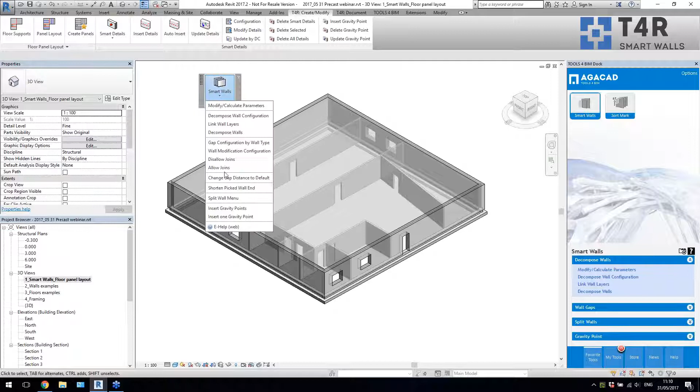So today I will use a couple of tools, and the first of them is Smart Walls. Okay, all of the commands are listed here. I can use it from this dock, or I can click on this one and drag it from here, and I can find the same commands here. So I can do the same with all the tools, and also if I need some help I can click on this one and it will bring me straight to the help page, some getting started videos, webinars and technical documentation. But let's take a look at how it works and what we can do with this solution.

So when you model some elements in Revit, you can further use our tools to reach the result you want. So what do we have in Smart Walls? We have Decompose Wall. This option gives us the opportunity to split the multi-layered wall into a couple of walls. So if I select, let's say, two of these walls and click on Decompose, I have some configurations for how to decompose them, what wall should still remain and so on.

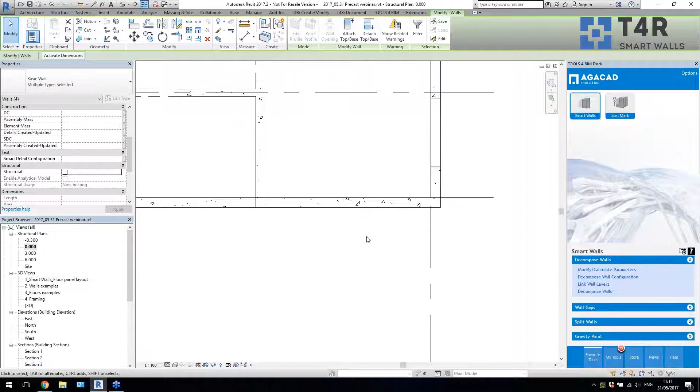But now you will see that I have different walls, and I can select them, and these are not the layers anymore, but only walls. So let's say I make them architectural, and I have only structural walls now. So that's one of the features, but let me just undo that. Let me leave it like this.

And what I actually want to show is other functionality, which I use more to create panels for the precast elements. In the wall gaps section, I have gap configuration by wall type settings. In these settings, I can define what the gap should be when I split the walls into panels. So let's say for this type of wall, I want a 20 millimeter gap. For this type of wall, I want a 0 millimeter gap, and so on.

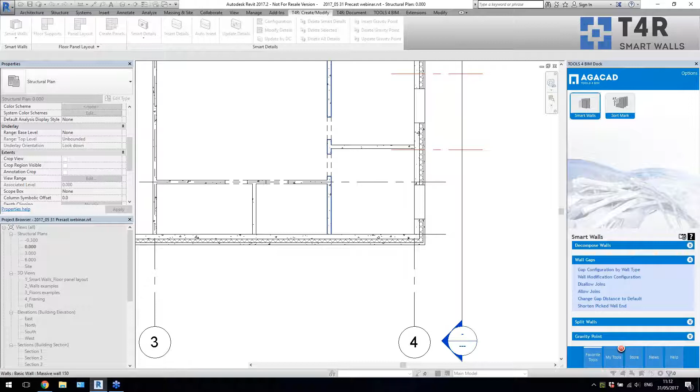So to work with walls, we have the split wall menu, and we have the Shorten Picked Wall End command, which I use a lot. So let me just switch to level 0 and show you how it works. If I select Shorten Picked Wall End and select the end of the wall, you will see what happens. It just disallows the joint, and it gives me this gap, which is defined in these configurations. So I can go around my walls and separate them, making individual walls separated from the others.

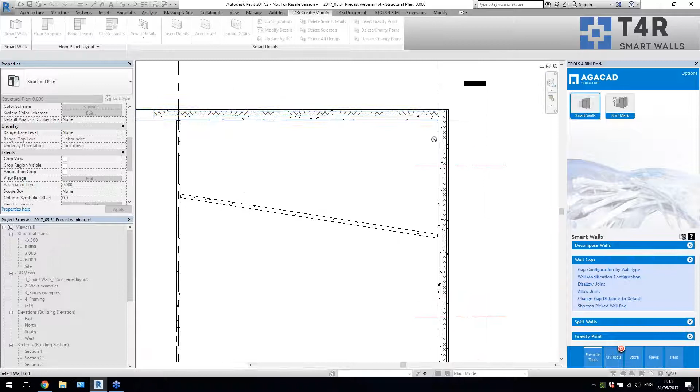If I click on this one, I can change the position, right? Okay, so let me just do this a couple more times. Okay, this one also, and this one. Okay, so I separated the walls. Now they are not joined. This is what I want actually.

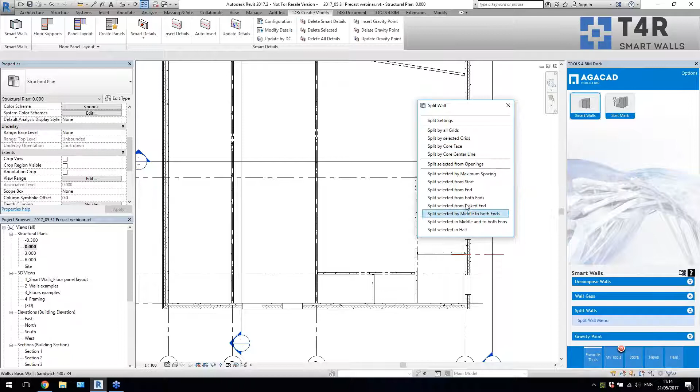Now I will switch over to the split wall menu, and what do we have inside here? We have some splitting commands, like individual splitting commands by selecting grids or other walls. We can split by openings. So let me just go to 3D view, and I will actually use this.

We have split settings here, right? So how to split around windows, around doors, around other openings, and what should be the distance for the panels when we are splitting them by using these commands, right? The maximum is for this command, and this distance is for other commands. So we can define some settings here and then use it.

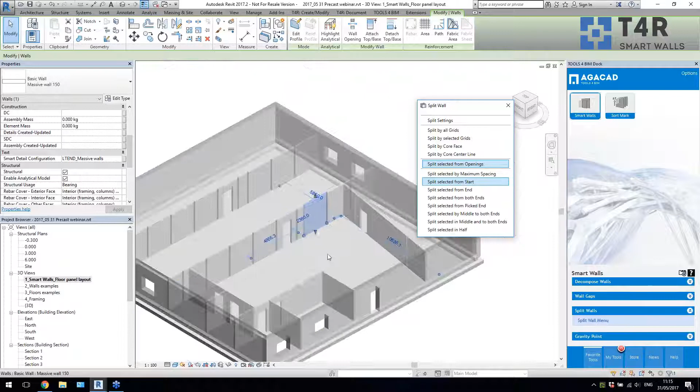So I select a couple of walls and split from selected openings. So it will just do it like this. Then let's say I would like to split these walls also just from the start of a wall by defined distance, right? So now I have this wall where the length of the wall is just based on my splitting settings, right? And then the leftover here. And so I split some of the walls.

If I select this one, split by maximum, let's say, spacing, right? So again, I have big walls just based on this maximum spacing value. So it just divides all the length of the wall and applies the biggest value it may. Then I have some individual splitting options. Let's say I can use grid lines to split the walls.

So I will go to the section view. So let's say I just create grids like this, different type, and then I can place some dimensions and define really exact positions of my splitting location, right? So let's say I can fix that, and then I can split by selected grids.

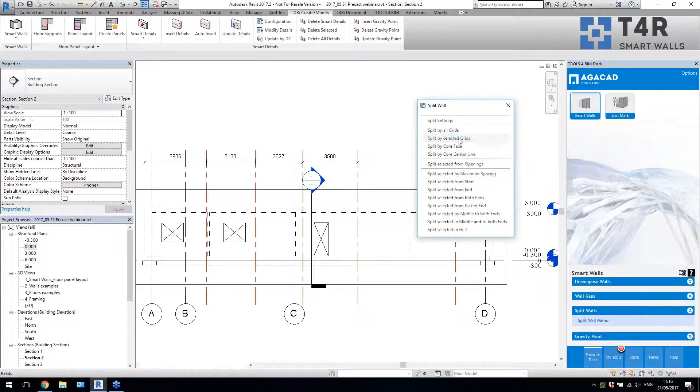So I select the grids which I want to be the splitting points, escape, and select the wall, and then escape, and then it will split into the exact panels which I defined with the grid lines, right? So now I have all these panels split. Let me go to this view. So, okay, I have it here. I have this one.

Okay, so that's basically it. You can explore some of the options if you want to. You can download any of these tools and use a 14 days trial. So you can explore other features if you want to.

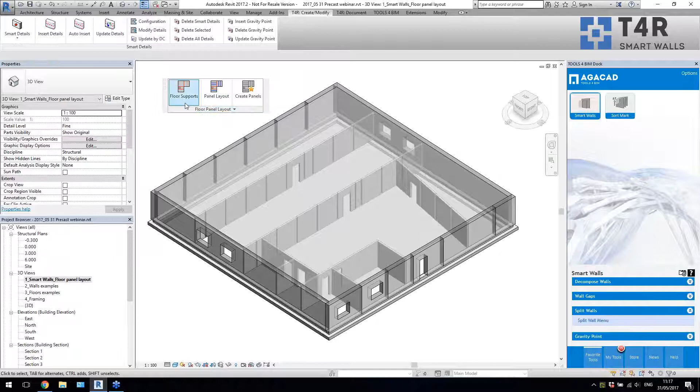But now let's move on and try to use another solution. Okay, I will hide this one. So now I will use floor panel layout. This is the tool to work with floors to create hollow core slabs or double T slabs or filigree slabs or massive slabs, bubble deck slabs, whatever you want. But actually this is for how to create panels based on an existing floor.

So now you see I have one floor, just one single floor above all of the walls. And I will use this tool to create my floor panels. So first of all, I want to select the floor supports. So now from this menu, I will use a couple of commands just to define my supports. So there are a couple of commands to pick these supports.

So let's say I will add supports. When I select the wall, it will add, you see, the split line to this floor. So I have regions. Where do I want to place my floors? So I want to have a floor from here to here, from here to here, and from here to here. So I need some regions, okay? So I'll add a couple more.

So I will add this one. I will add this one. No, actually, I would like to make it a little bit in a different way. I think I will do it like this. I will split this one again by selected grids. Okay, so now I have it. I think it will be better also for the floors.

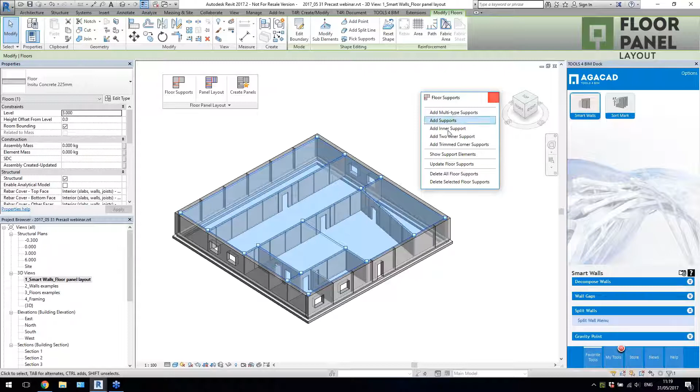So let me do that. Okay, I have it like this. Okay, add supports, additional supports. Okay, so now it's what I want. Okay, so now I have different regions here. So I just split into the regions and I selected the supports, right? So I will close down this one. I will open panel layout.

In the panel layout settings, again, we have what size of a panel should be created and what should be the rule. So when I select that, I can select the option if I want to create panels for one of the floors, just like this. Maybe I will just delete that. Or I can do that for the whole floor, right? So I select one of the panels and it will just create the layout of the panels

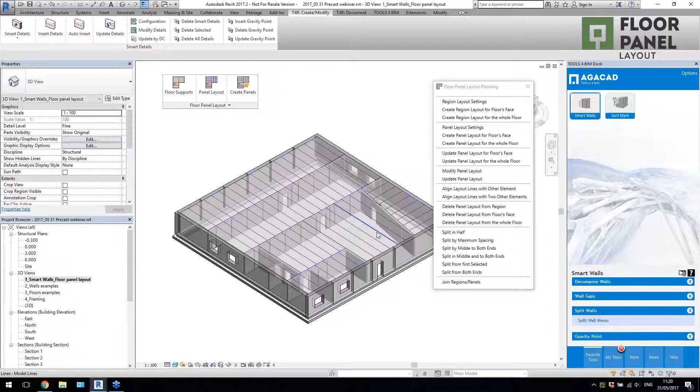based on the supports. If I don't like, let's say, this region, I want to update it. So I can click close to this side. This will define the direction of my floors. So if I click on that, it will change the direction, right? If I click near this side, it will change direction to that side. So I can modify that. Okay, so I want to have it like this.

Again, I can join the regions, maybe I want to have a massive slab in this place or just a cast-in-place region and so on. So I can do that. Then, let's say, I can modify the panel layout, right? So I will just select this one, change the distance, modify, and it will give me a different layout, okay?

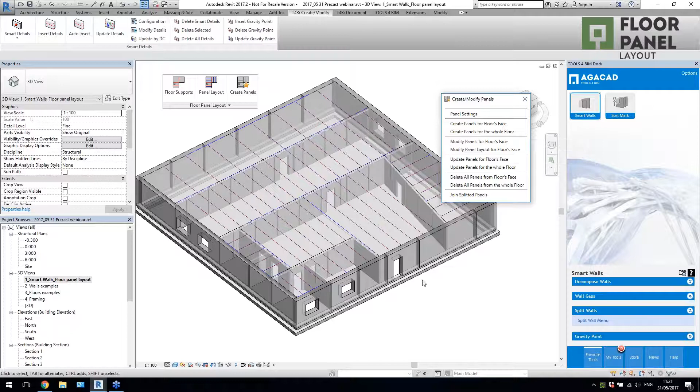So currently what I do is just the planning, right? These are only the lines, I don't have actual panels. That's why I need this last step, to create floors in these planned areas. But in panel settings, I can define that I want to have this kind of support width for the panel above the wall. So I can define these values.

I can select the parameters for the floors, so I can make a schedule with the width and length, right? Then for the precast floor, I just select the type of the floor, and I can insert holes if I want to. These are predefined holes, but you can modify them if you want to. So you prepare these settings: how you want to have supports, what kind of floors should be used, and then you create panels for the selected floor face or for the whole floor.

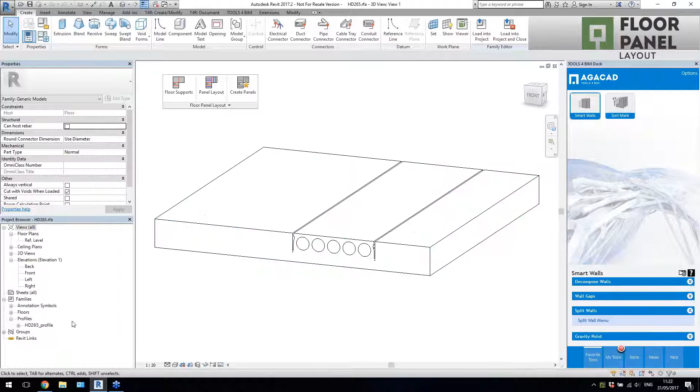So let me do that for the selected floor face, and I will just select one of these lines, and you will see now that in this area I have these floors. They have automatically calculated parameters, so I can make a schedule. These holes are a generic model family. I can edit and modify it simply by editing this profile. This is the sweep, right? So you can easily edit this family based on your local manufacturer.

Okay, so let me get back here. Maybe just another one, create over here. So again, the floors like this. In the leftover, which is not 1.2 meters, I have only cast in place or just a selected type of floor, right? So this is a different type of floor. This one applies in this area.

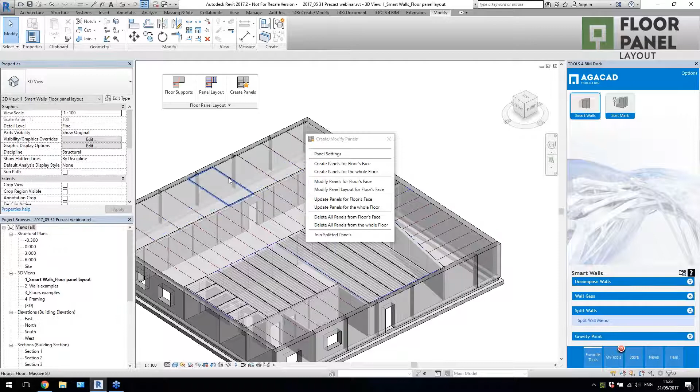Again, I want to change the size, let's say, for the small slabs. I want to use different holes, right? So I will do it like this. Create panel and just create it here. So now I have smaller slabs in this area. Then let's say I don't want to have holes, I just want to have this thickness of the floor. So now I'll create floors over here. So now I have the floor which goes like this.

And if I go to level 3 and measure the distance for my floors, this is the floor which I created. And you see that this is the distance, 8 millimeters, like I set here in the settings for the walls, from the face. So when I create the floor, it automatically extends the floor over the structural wall. So that's how we can create panels, right? We can create our floors.

Let me go back to this view. Okay, when we model these elements, what we can do next is use smart details. Smart details basically is a solution to insert details, connections, cuts, just to get to the final shape of our elements.

Let me show how it works. It has configurations. In the configuration, you select the category of elements which you want to work with. Let's say I want to work with walls. So I switch over to this category.

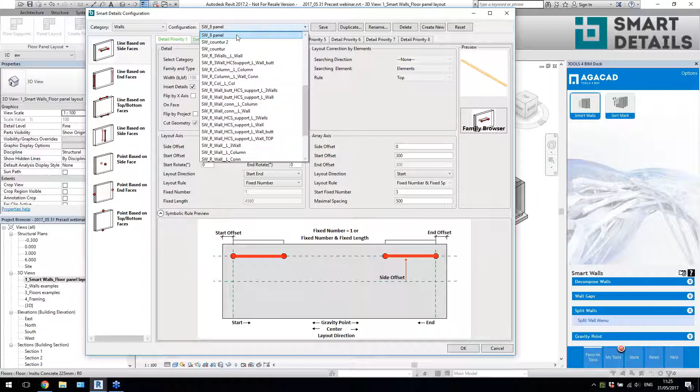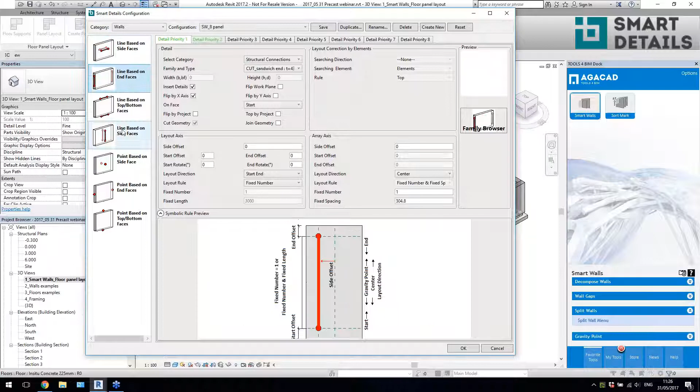And then, okay. Now you see I have created a lot of configurations, but just for different purposes. So what you see here is tabs where you define where and what kind of detail and in what kind of rules should be used to place this detail. So these are for the line-based elements and these are for the point-based elements.

So let's say I select this tab and I want to place on this face some kind of detail, right? So I go to this detail priority tab, I select my family which I want to use from the list or from the family browser which I have. So these families could come from the manufacturer or you can create them on your own. And you decide where to place it.

So I want to place this at the bottom face of my wall at this time. And I want to place it just side offset. You see all the options here: start offset, and so on. I want to use the rule maximum spacing. And then in the other direction, I want just to place it in the center and just one element.

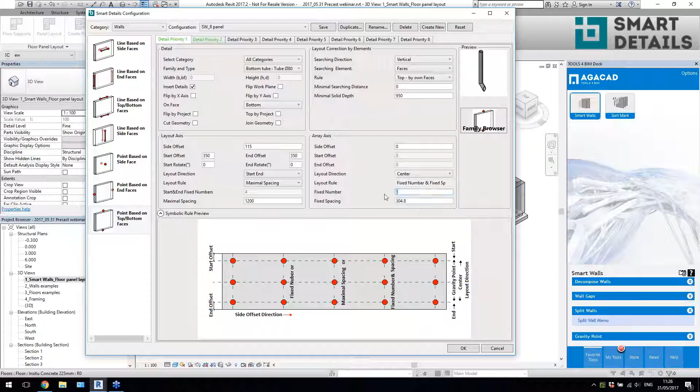Right, and then layout correction, we have some options here to look for the solid faces like you see in the picture. So if there is not enough space, this detail will not be inserted and so on. Then what else we have? Let me switch over to another configuration, and I will show you. Okay, what else?

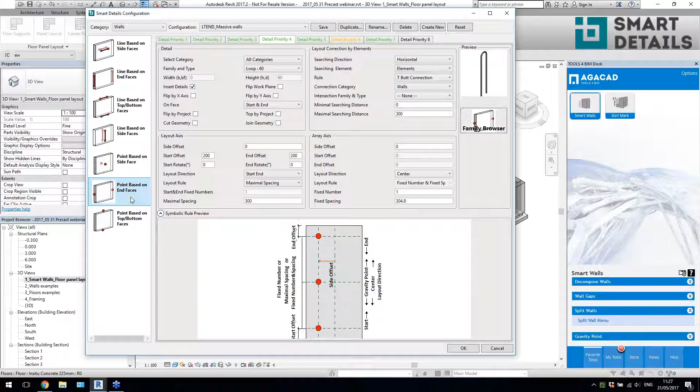I want to insert a detail at the end of my wall only if I have a T connection with other walls. So I want to place it on the side of the wall if I have a T connection with the wall. So I have different kinds of connections with other elements. It could be walls, structural framings or other elements. If I find an intersection, I will place this detail. If not, this detail will not be placed at all.

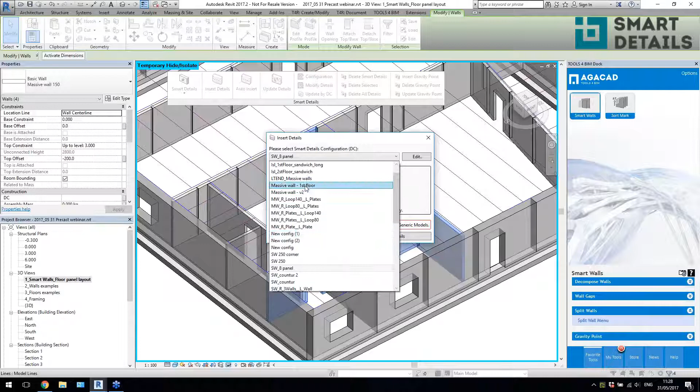So let's just close down this window and see how it works. Actually, maybe I'll just filter that. Check none. Okay, I'll just temporarily hide these elements, and let me select a couple of these elements. Maybe this one, and now I will select to insert details. The list of configurations appears, I select my configuration and insert details. So it will place the details based on the rules for all of these elements.

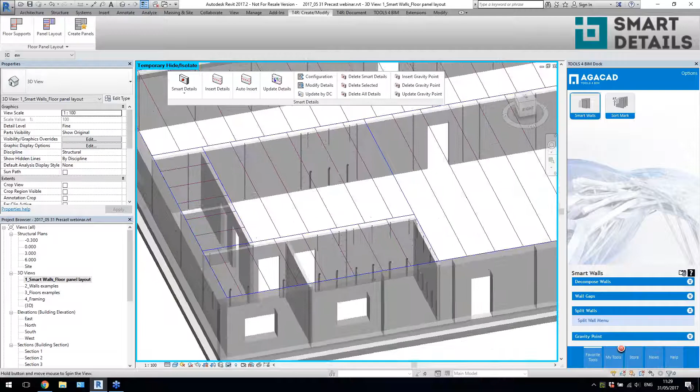So we will see some different results because, as I said, we can search for different connections and insert different kinds of details. So let's take a look at this one. It has only end connections, so it places only these details based on my settings. Then these details at the bottom face and these details at the top face of my wall. Also, I have this kind of cut at the end of the wall, so I can use it.

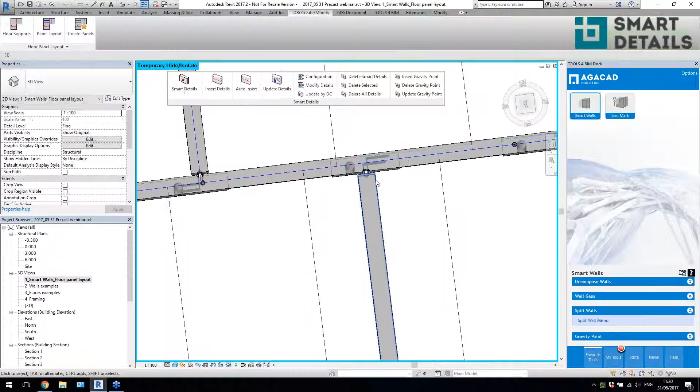And then let's take a look at this one from the top, maybe it's the best visible view. So you see we have these types of connections because we have a T connection. If I select this detail and click on modify, you will see that this detail is only inserted if we have a T connection with a wall. So now I have this detail and this detail in the intersection with walls.

Then this one, again, at the end it has just a simple one, but then it has an L connection like this between the walls. So it places this detail when it's an L connection with other walls. So I can define what kind of detail and where it should be inserted. So these are a couple of examples. Okay, maybe I will show you another one. We can switch over to the other one, over here.

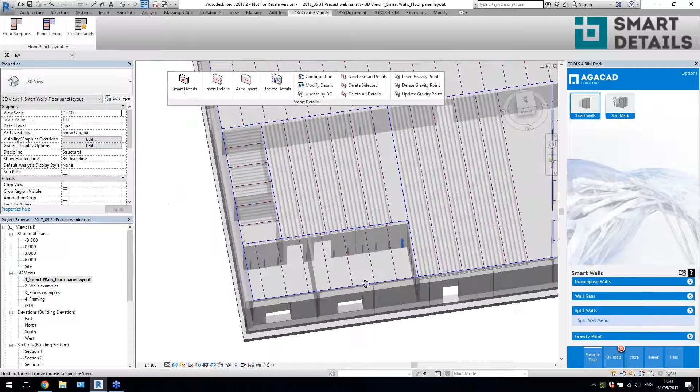Let me just filter the floors. So I selected a couple of walls and floors, select to insert details, select the configuration which I want to use, and insert them. So now I have my cuts at the end of the floor. Again, this is just what I create. I can modify this. This is the line-based details placed on the top. I can make some changes, click on update, do some individual changes.

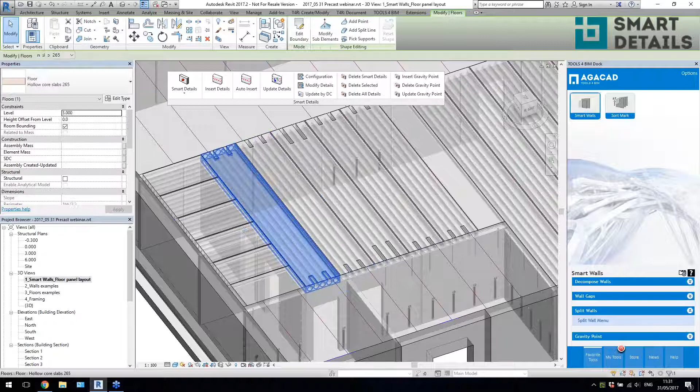I can select the floor again, just modify these details, just go here. I have some predefined details, so I will just click on update, insert and update. I'll place some anchoring cuts for this selected floor, and I can quickly make some manual modifications. So I have modify, update, delete options and so on.

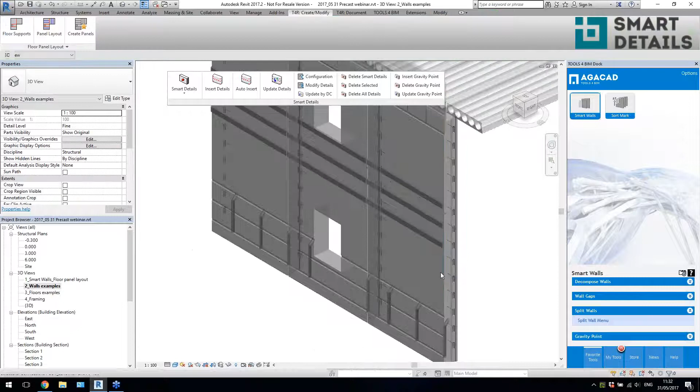Let's take a look at a couple more examples. I have here, let's say, these walls - they are pretty high, right? So I just placed some reveals by defined rule. I placed also some sweep just outside the wall to join with it, and at the top I have a cut. So these details are good also.

Oh, I see these details are bad, but actually what I will do is just click on modify. I know that I selected the wrong family here - I need to select this one. Smart details have the possibility to read information from the object, so you see now the wall is this size.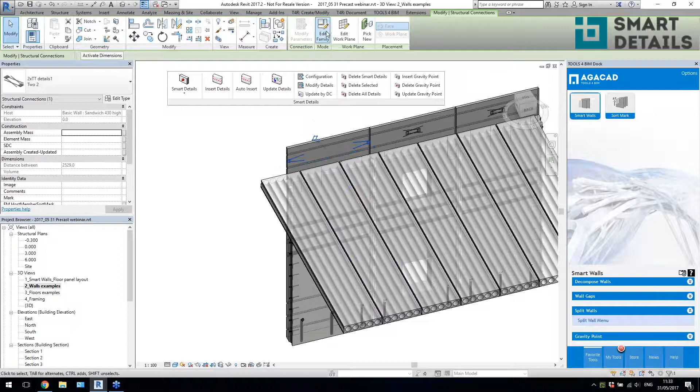The details find the size of the wall, and if we'll take a look to the family, you can create special parameters which will change, let's say, the size of your detail or the distance between your details, just based on your element size. That's why it just follows the size of the wall over here.

I'll show you a couple more examples here with these walls. Maybe I'll just go to the section view and take a look now. I have this kind of walls, this kind of opening just joined with a couple of concrete, and I have walls like this, and like this. So let me just select these walls and do the auto insert.

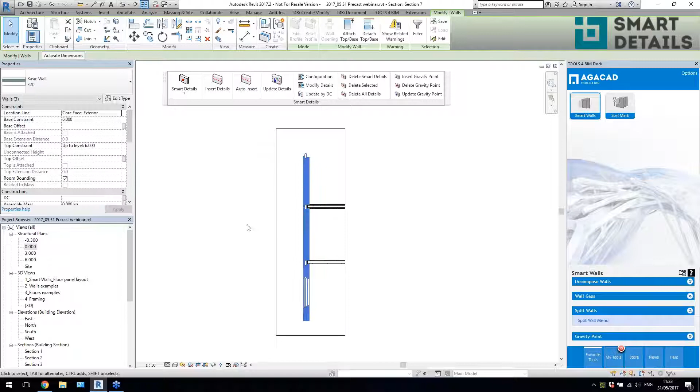So what does it mean, auto insert? It means that it will read the configuration name which is inside this parameter - it reads this name of configuration and applies that configuration. I don't need to go and select from the list.

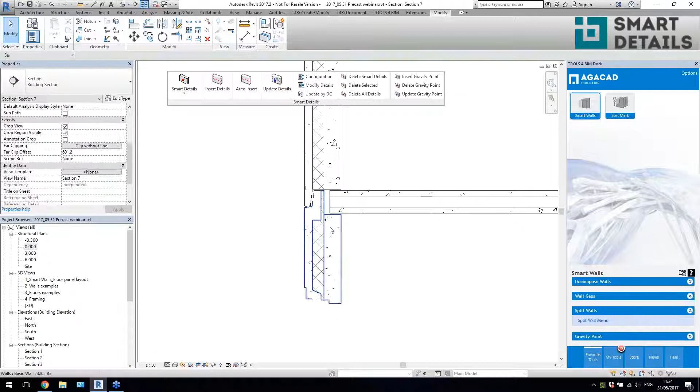So what's the result? I have placed some cut at the bottom, cut the top, and added this concrete detail, so now I have a good connection. For the top wall again I have this kind of cut just to cut the top wall, so now it looks good. In the section view, of course, I have some vertical cuts over here at the ends.

These are my window families, but basically that's another type of wall which could be created. Let me show you a couple more examples - let's say I will just select a couple of these, and I will just do the same: click on auto insert. Hopefully I have added the names of configurations.

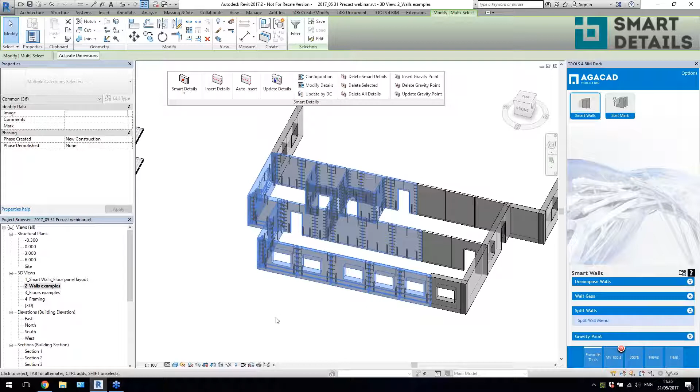So 16, 17 walls at the end - I have like 36 walls with details now. These are massive walls, right? As previously I showed you, like this, then we have T connection, we have these elements, then we have L connection, again we have some bend, stirrups and so on. So it could be like this, but these elements are sandwich walls.

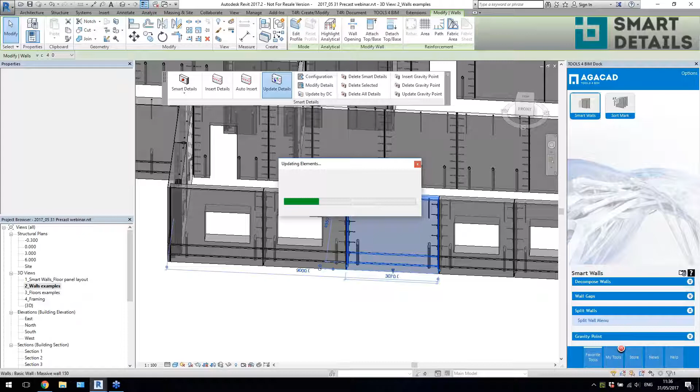So I placed just a couple of details right over here. Let's say if I will delete this, I'll do actually update details - you will see now that I have an additional tube here because there is enough space for this element. In this case, I don't have this one because there is just not enough space. So I can define that in my rules.

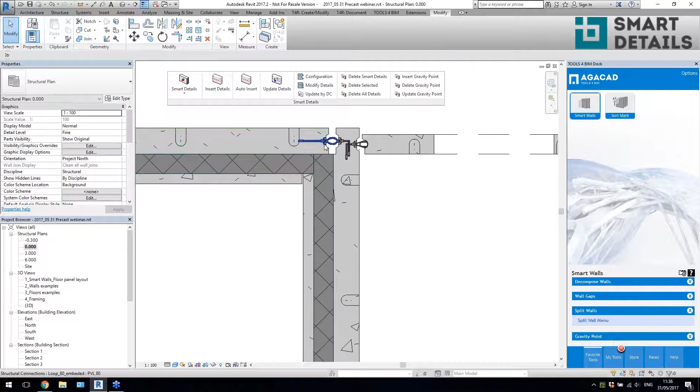If I'll go to level 0.000 and take a look to this view, what did I do? I just placed a couple of openings, just created some families, just the shape, how do I make my connections, when I placed these elements, distributed them along the detail and so on. So over here we have also some connections at the corner.

So again, I have decided how and what should be done - what kind of connections do I usually use. And then I created these walls. This is the cut which I inserted at the top to place my hollow core slabs and so on. So you can define whatever you want - some architectural reveals or whatever.

Okay, what do we have? Floors. Okay, walls examples we have here. Maybe I will just stop here.

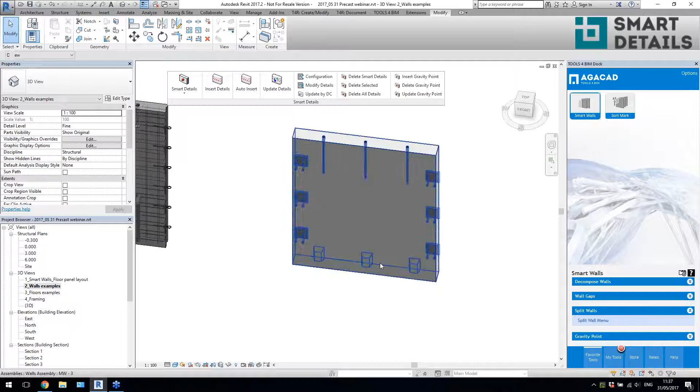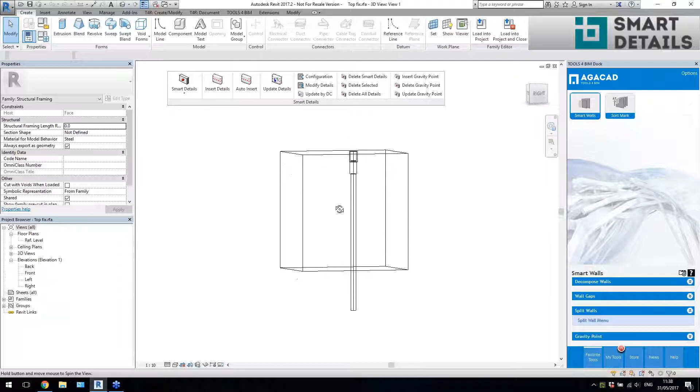You can insert plates, right? So just different kinds of connection, or just at the bottom if you use this kind of connection. Again, these are just simple face-based families. If I edit this family, it's just simple extrusions placed in the location I want. So it's really nothing to create them or use some families from manufacturers.

I will switch over to floor examples. Again, floors could be line-based elements inserted, some point-based elements.

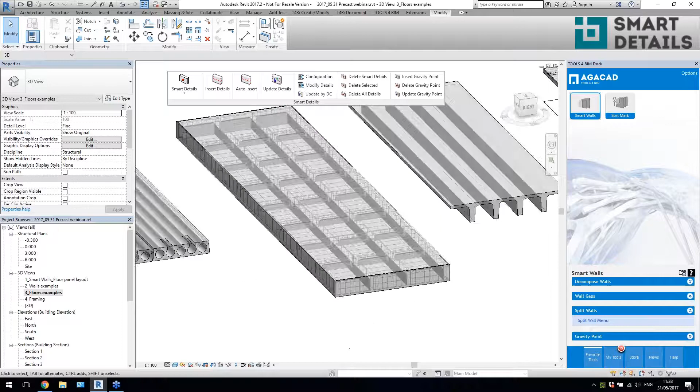Okay, another example, filigran slabs. Let's say this kind of slab with additional support elements and beams on the side. Hollow core I already showed you. Then this is the cut. Actually, only the void was inserted to form this kind of element. Again, this void can read information from your floor and adapt the size and so on. This one is again just based on your floor.

Over here, I have this kind of detail, then a long cut along the floor, when I have distributed this kind of composite elements on the floor and so on. So you can make it in different ways.

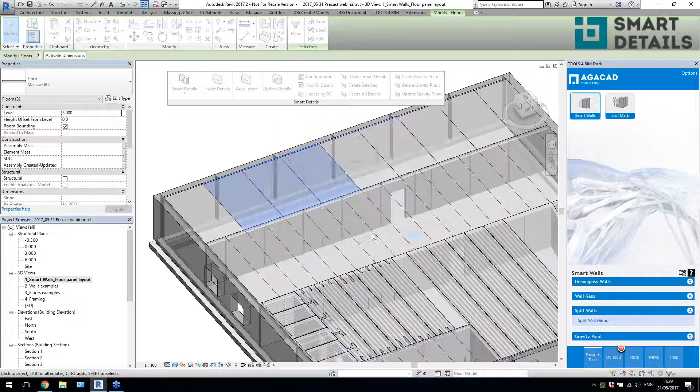Let me just go here and show you a couple of examples. Let's say these, and I will select insert details, filigran slab, insert details. And you see now I have these elements. These are just a line-based family which I created right over here.

So I don't know, the maximum spacing, what's that, can we change that? Update and have it different. So it's not a problem to change that, or just change the offset from start and so on. It depends on your settings.

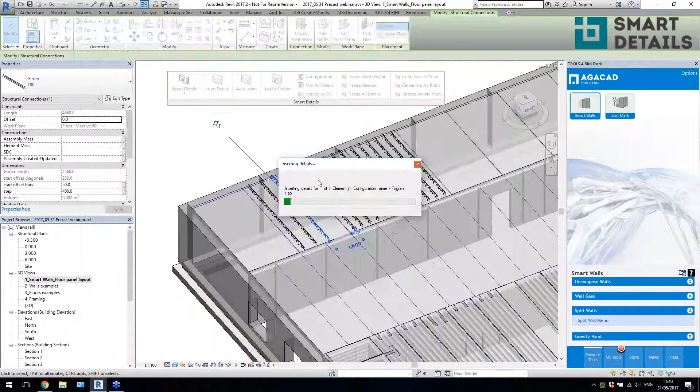Okay, maybe in this direction we can also make it different. So again, modifications could be just as you want, quickly in the local area for the local selected elements.

Let me switch over to this one again. If I will select, let's see, foundations again, I think we can insert some elements here. This is the wrong family probably. Okay, I will just make it over

to the update of my details. No, you don't want to. Insert and column bolts - this one was already. Why it didn't work out? I know, when I place the detail I need to change this, and then probably this time it should use the last settings. I will again - I have used the wrong size.

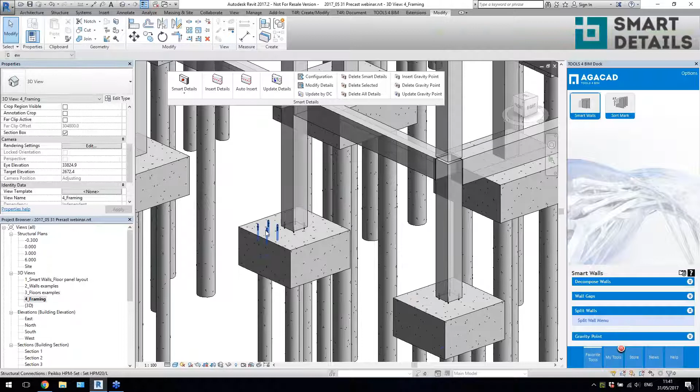Okay, so I'll just do it like this now. Insert details, insert some bolts. Okay, so I have them like this on the foundations. But now what I want to do is select the columns and framing elements, and

I will click on auto insert, because I have entered again the name of configuration into the beams. I just don't want to waste your time by picking the configurations from the list. So let's just see.

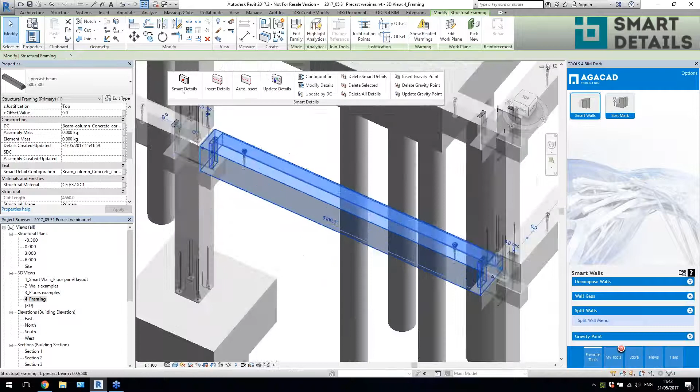Okay, so I have selected 59 elements, and now I have some details, right? What do I have? Let's say this beam. So now it has this kind of elements, just inserted by gravity point, two elements. I can make some changes, do the update if I want to. So it will just move around the gravity point of the element.

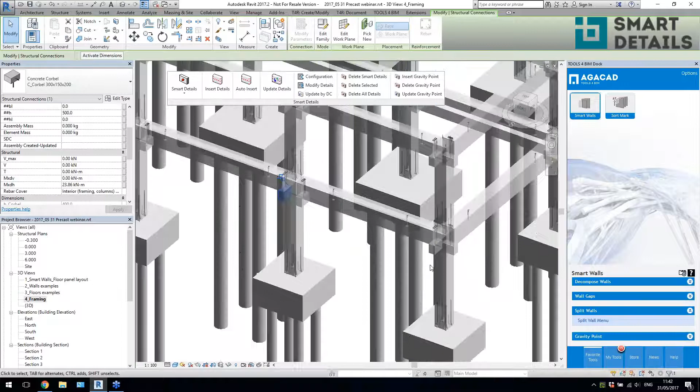Again, I have placed these corbels, and if you see, this is the corner column. So again, it finds how many structural framing elements we have. If we have this beam, so we have this corbel. If we don't have a beam, we don't have a corbel. Let's say in this area, I already have 3 corbels, 1, 2, 3, because I have 3 beams again.

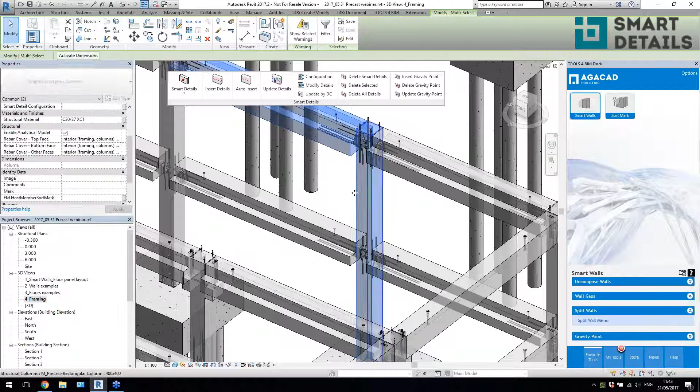Then I have columns which go from the first floor to this last floor. So when I have a T connection, I have this kind of detail with anchors to the top and to the bottom. But when I have an L connection, I have this kind of detail, just anchors to the bottom. So if I take a look at configurations, you see L connection and this T connection, this detail. So again, another feature of Smart Details.

Then, okay, if I will make changes to this beam - right, so this is a bigger beam, now it's not fitting.

What can we do about it? You see now the hole is not coming through, the corbel is not in the right location, so I will just select these three elements and do the update.

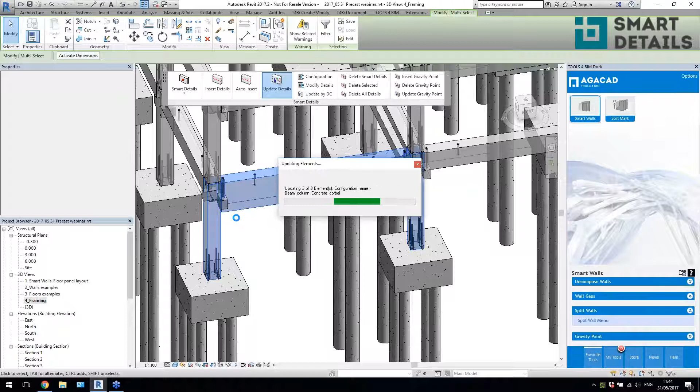Now it will read the size of the beam again and move the corbel. You'll see it's now under the beam, because I can use special parameters to read the size of the beam, and then move my corbel based on that.

I did the same with the hole family, it's also reading the size of the beam. You see, it's 1000, so now it's changing the size, because this hole has a parameter reading the size of this beam.

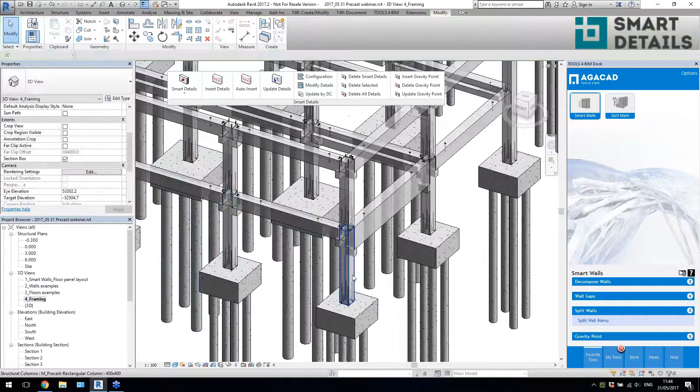These are different options for working with that. If I change the size of the column and update the details, the column shoes will also follow the size of my column, because they are reading the H and B values from the column family. So in the family I can use these parameters to move my elements. If my column is bigger, the distance between my bolts will change size, and so on.

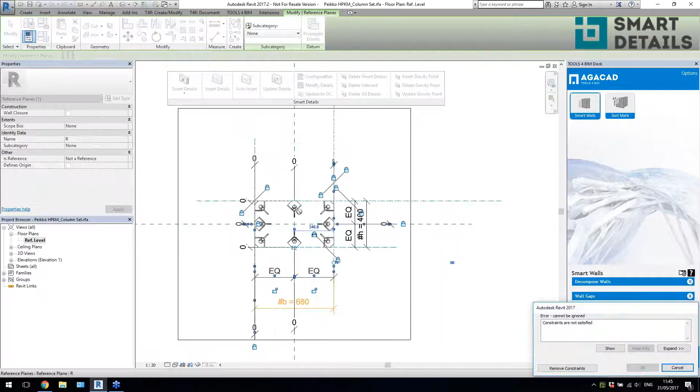So that's another feature of smart details. I think that's enough for the smart details. We can move on and try another solution, sort mark.

I will use it from the TOOLS 4 BIM Dock. Let's see what we have here. What can we do? We can automatically number elements.

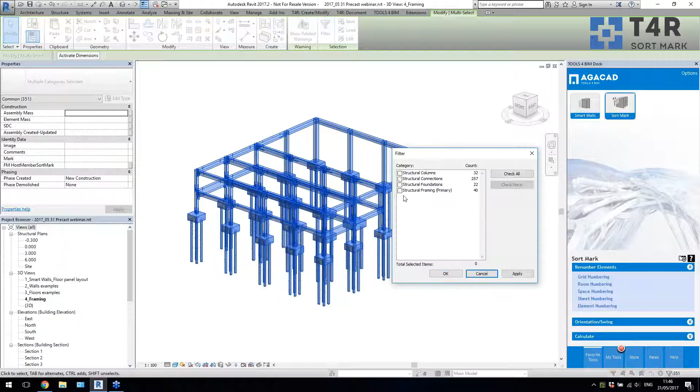Let's say I select the elements I want to renumber, beams. When I go to element numbering, this time I'll write information to the mark parameter, click OK. What kind of information do I want to write? I can define it in these rules.

I can save it based on my settings. I can group them and number them based on the selected parameters here, let's say instance, or an additional type parameter, we can add it. If these values are different, then we get a different number. There's also additional subnumbering, sorting, how to sort them, and what should be the prefix before the number.

If I click OK now, it will renumber all of these beams. Some of them will have the same mark because they have the same length, volume, and so on. But if I take a look now, the mark value appears here. So I have different mark values for different beams.

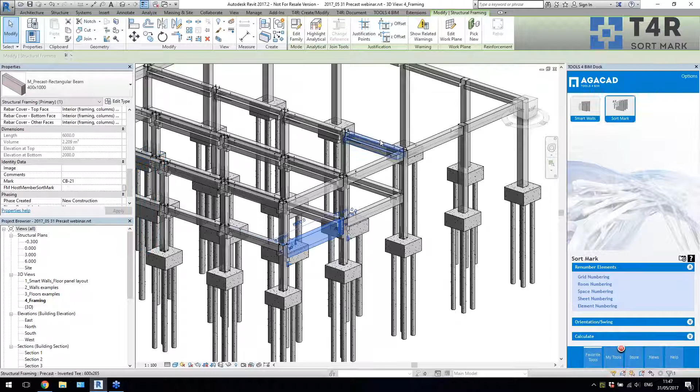I can do the same for the walls, for the columns, element numbering. I can do that for all elements of one category or for selected elements. Let's say for the walls, I will do the mark, and I can save different configurations.

How do I want to number them? I can even use sorting coordinate, just go 1, 2, 3, 4, 5, keeping the order. Or I can add an instance ID parameter, so all of my walls will have unique mark values. Then prefix and so on, so I can select what kind of numbering, and 94 walls were renumbered.

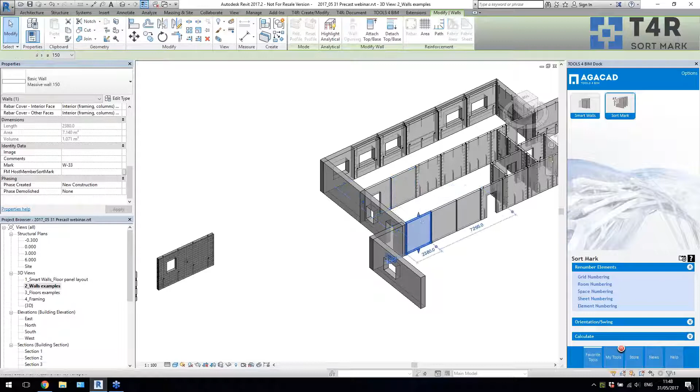So if I go there, all of my walls now have unique numbers, they are renumbered automatically. That's good. Now the final stage is to create drawings.

For that I will use smart assemblies. This solution is created to create the drawings. What do we have here? We have a lot of commands, but let me quickly guide you through.

So shop drawing configurations, again we have some configurations for how to and what to create. Let's go there, where is it? Over here, so now I have a couple of configurations already created. Let's say this one, you'll see that I want to create these. Maybe I'll just select the column, it's more interesting.

Now I can create assembly views and model views, any selected type of view. It could be some default Revit assembly views, or flip versions. We have legends also, we can rotate these views automatically, select the view template we want to use, and select the dimension rule, described in the dimension rules dialog window.

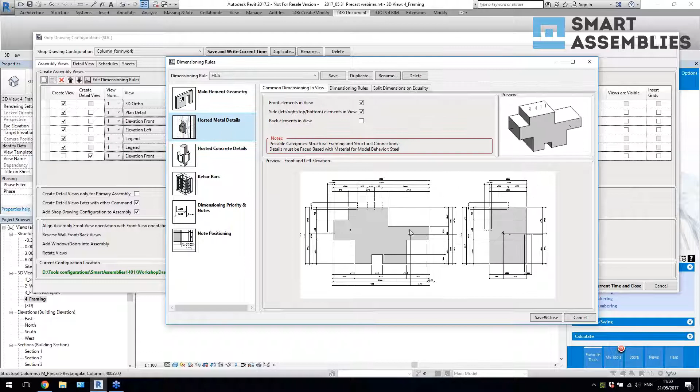Again, different kinds of dimension rules could be created: how to dimension the main element, how to dimension openings in the main element, how to dimension hosted elements, concrete and metal details, then how to dimension rebars, and what kind of information should be provided.

Should we place the note? Should we place the dimension for these elements? Okay, so you prepare them and you can assign this for any view, different kind of dimension rule. Then we can tag elements, we can insert gravity point, we can reverse views and so on. These are options for the detail view, right?

So for the views in the model, then we have schedules. Again, we can create as many as we want, material takeoffs by using some templates and so on. We can create it for instance or type of assembly. Then we can create sheets and we can create sheet templates. So it means that we can place views on the sheet automatically.

So let me just go ahead and show you how does it work. So I'll select only columns. I select 3 of the elements, right? Okay, so let's say if I will select this and I use Revit, it will create one assembly like this, and you will see that all the details are not included, right? So that's the way Revit works, and that's a little bit different with the smart assemblies.

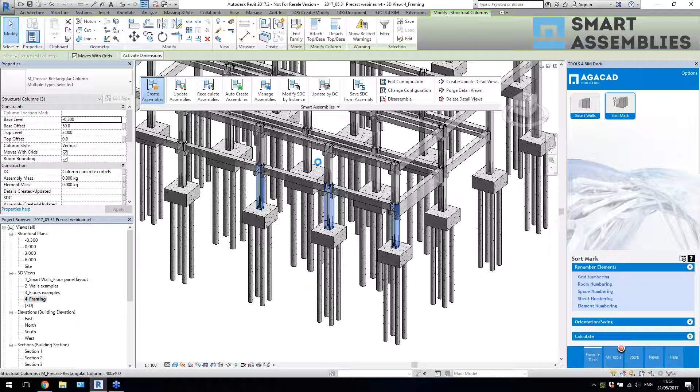With smart assemblies it's like this. I select only elements, main elements. When I click on Create Assemblies, where is it? Okay, and I select the configuration which I want to use, and I click on Create. So it will create assemblies for me. It will automatically add all the details, hosted details, to the assembly. I selected also to insert gravity point, just based on material and the geometry of elements, right?

Then it will also create the selected views. It will place the dimensions based on the rules, dimension rules, and it will also place the views on the sheet. So I don't need to drag my views on the sheet, because you can use a template project where you keep your assemblies and your sheets of assemblies, and then use the same layout of elements in the views in the same way, in the same order.

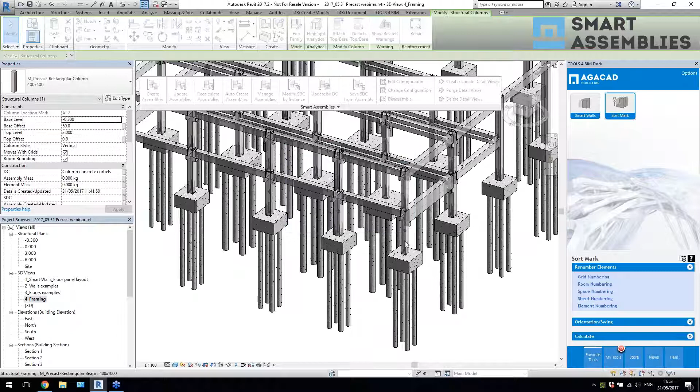So let me show you, like this is one, this is another one, and another one. So I have 3 assemblies right now because they are all different. Let me just select another one. I want to show you also one additional feature. So I'll select this one again. Okay, the same configuration, because now this one should be the same, I think. Yeah, it's the same. It's a copy of this one. So they have the same type, right? So that's the way Revit works.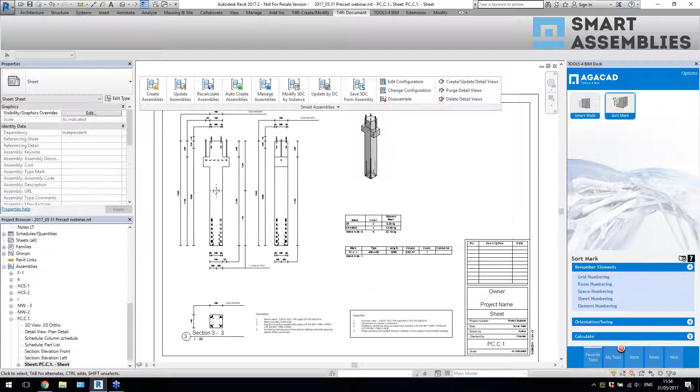So let's take a look at the assemblies. So you see now I have created this assembly, and I have some dimensions just as I defined to place these dimensions, to measure the elements, to measure the gravity point, to give the total dimension of elements, to create 3D views, some schedules, place legends, and the selected number of the views, right? So maybe over here. Okay, this is another one.

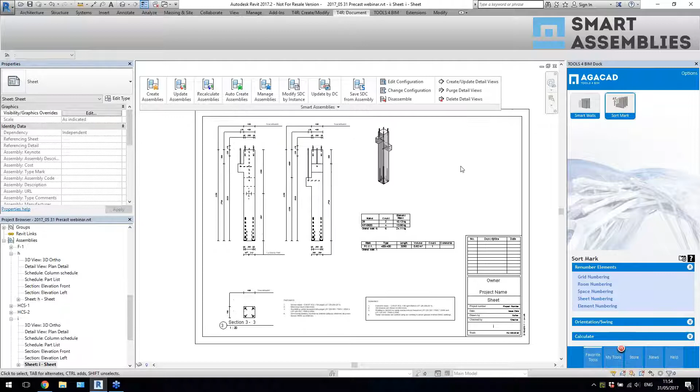So I didn't renumber my columns, so that's why I have such names. Actually, the name of assembly is the same as the mark of the element. Okay, so I have created a couple of assemblies. So another functionality of smart assemblies is that, okay, let me select. So now this command selects all the same type assemblies, but I want to see the primary assembly, the assembly which has drawings. So this one has drawings, right?

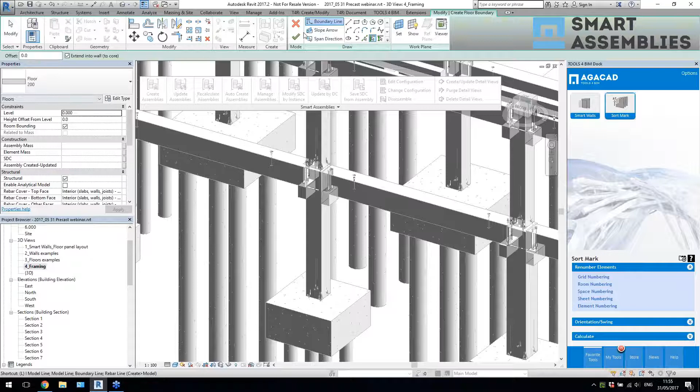So I have this kind of functionality, dynamic smart assemblies update. If I will turn it on and I will try to make changes. Oh, sorry about that. What's that? I want to add detail. Okay, this detail. So if I will make changes to assembly, it will give me a question. What do you want to do? Do you want to update drawings, or maybe you want to skip adding this detail? But I want to just recalculate that.

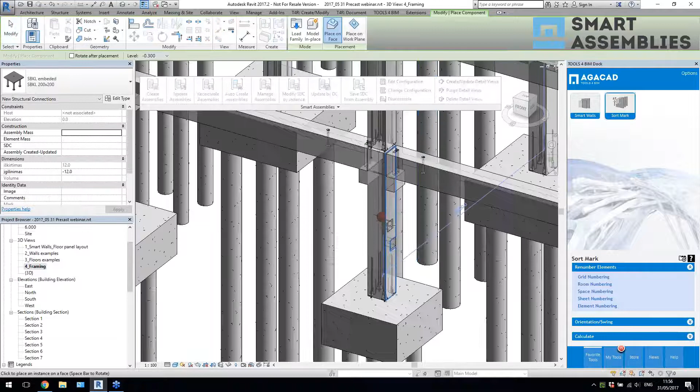So now it updates just the gravity point because I selected like that. And additionally, it will add the detail to the secondary assembly. So you see this one was updated also. If I will turn it off, just like that, and now we will do that, it will be just a regular Revit way. We make changes, we get a new assembly, right? And now these are 2 different assemblies. And the detail was not created in this assembly.

So that's an additional feature. So maybe you create the walls, right? All of your walls, and you create some assemblies and you forgot to add something to all the same type assemblies, so you can add that with dynamic update functionality.

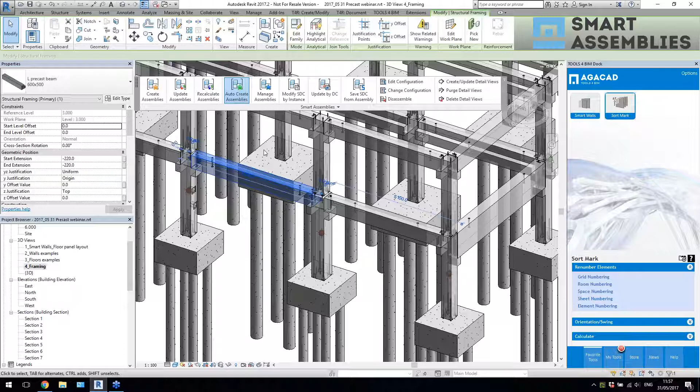Okay, what else? So we create assemblies. So let's create another one maybe. Just for this one, can I just auto create? Hopefully, if I have entered the name of configuration, again, it works the same as Smart Details.

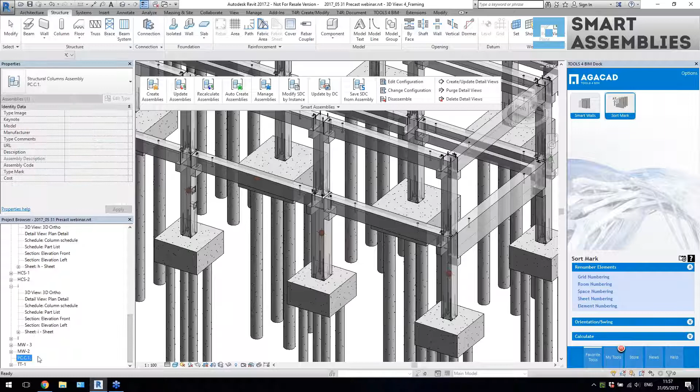Okay, so again, it works with different categories, with different elements. Let me just show you a couple of examples and we can finish today. Okay, maybe this one, yes. I have created, yes. So this is now the drawing, automatic dimensions, automatic placement on the sheet, and so on. So let me show you a couple of examples.

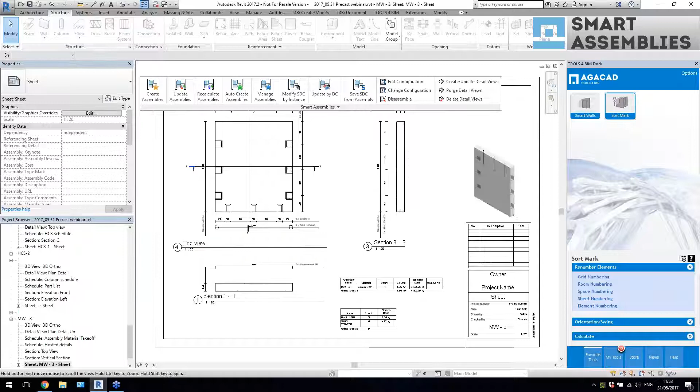Let's say this is automatic drawings of filigrane slab. So again, I have just dimension for the filigrane slab, for the reinforcement, some legends, and so on. Hollow core slab I have in this project created. So again, some layout which I defined in the template sheet, in the template project. Then I have this kind of wall, right? So it has some details and so on.

Then I have also modeled one wall with the rebars. So I placed one sheet only with the formwork drawings, right? So I have all these dimensions for my elements, and then I have reinforcement drawing. Okay, so I have it right there. So all the reinforcement table, and so on. So whatever information you want to, and so on.

So there are more options and possibilities, but I think it's enough for today. I hope you just saw the possibilities and so on.

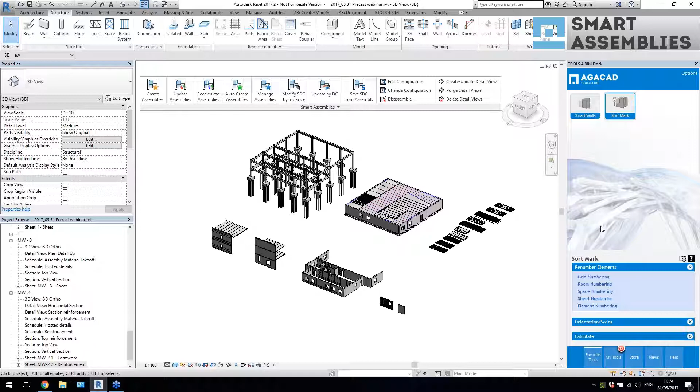So I just would like to give a word to Sergi. So you can continue from here and just finish the presentation. Hopefully. Okay, thank you, Valentas. Yeah. Okay. If you give me the control. I will make a presenter, so...